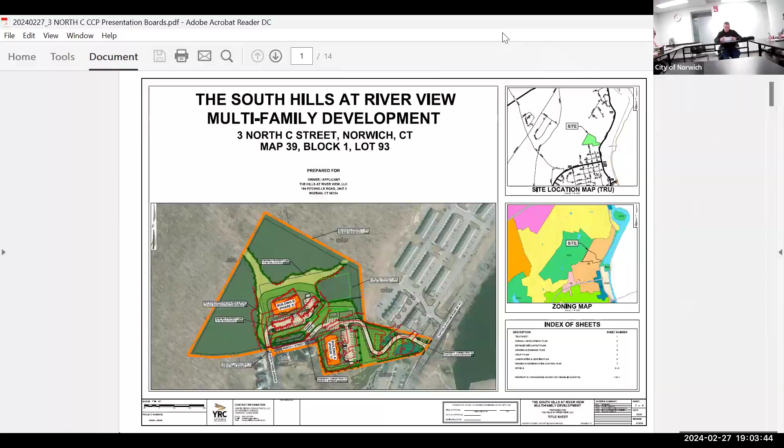The new business is a site development plan proposal, site development plan 1051, 3 North C Street, site plan review for a proposed residential multifamily apartment development consisting of 2 buildings with 33 units each, for a total of 66 units. The unit mix will consist of 24 2-bedroom and 42 1-bedroom units. It's the application and property of the Hills at Riverview LLC, Alex Gebby, principal. This is assessor's map 39, block 1, lot 93, zone multifamily.

This had been tabled from our last meeting. I see Alex's name up there somewhere. Brandon Handfield is on. Brandon, do one of you want to speak, or both?

Yeah, happy to take it from here. For the record, Brandon Handfield, professional engineer licensed in the state of Connecticut, with Yantic River Consultants, we have offices in Lebanon. And as you saw on the meeting tonight is Alex Gebby, the owner and applicant with the Hills at Riverview, as well as Kathy LaCombe, our project architect, to discuss the floor plans, elevation, and rendering.

Before getting into the proposed development, I just want to share my screen and take a minute to briefly go through the existing site, a recent lot line revision that was approved by zoning, and then the previously approved development. I'll show you the plan that we presented in 2020 to give some context of what we're changing. So as long as everybody can see my screen...

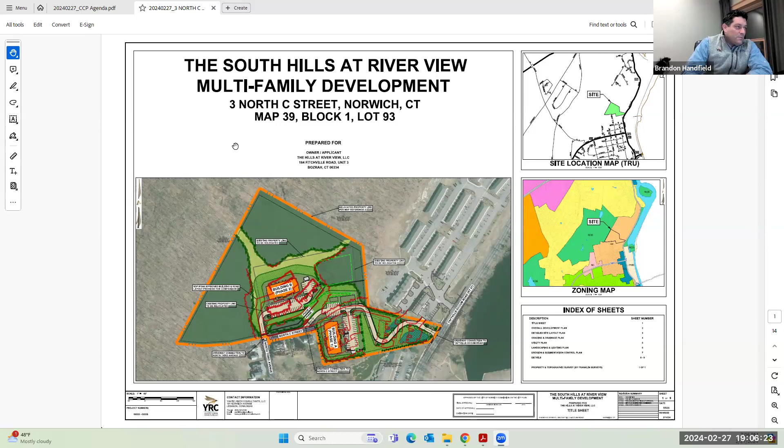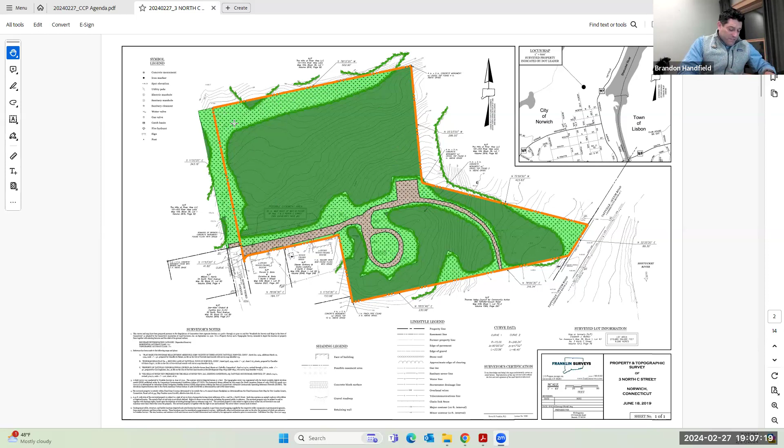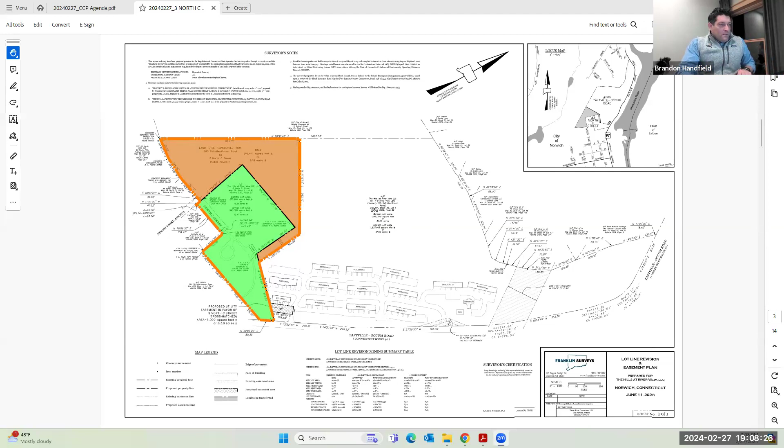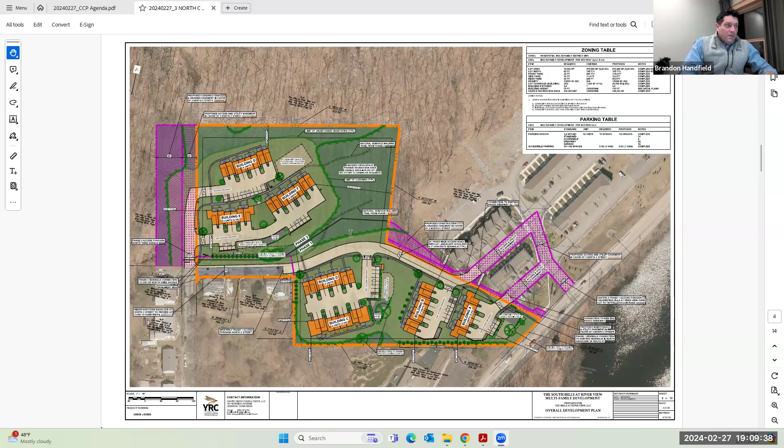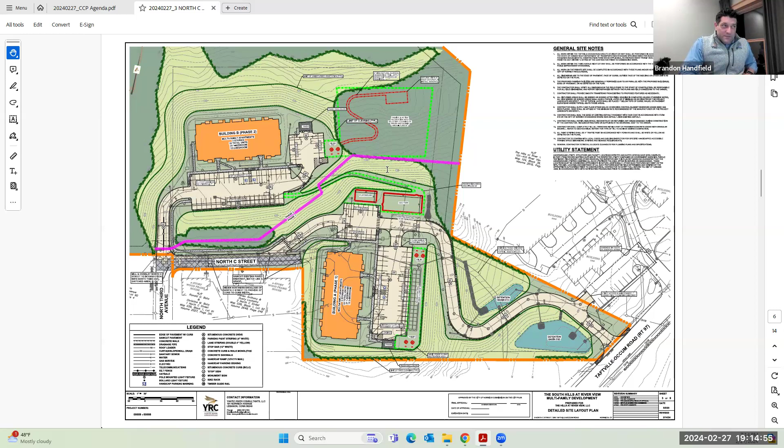We've got a retention pond down in the bottom right there. Yeah, it's a good segue.

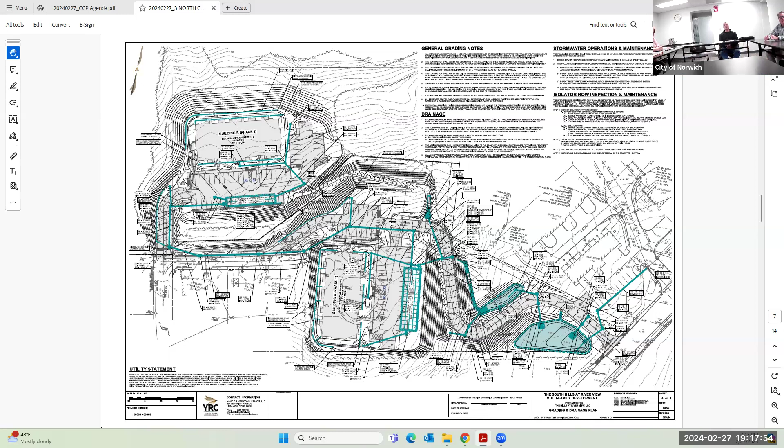Was there any issue with flooding in that area during the last storms? No, I haven't seen any issues with flooding. We're just trying to collect it and divert it where we want it.

So we have a lot of cutoff swales to pick it up so it doesn't come onto our development. It goes around it, and then we pick it up and put it into our system and hold it. So we are holding and infiltrating way more than we're required to.

So for a 25-year storm, we're reducing the outflow by half. And for a 10-year storm, which is about 5 inches or a little under, we're releasing less than 1 CFS, which is not a lot of water. So we're really holding more than we have to on this site intentionally, and that gives us a lot of excess capacity for those bigger storms as well.

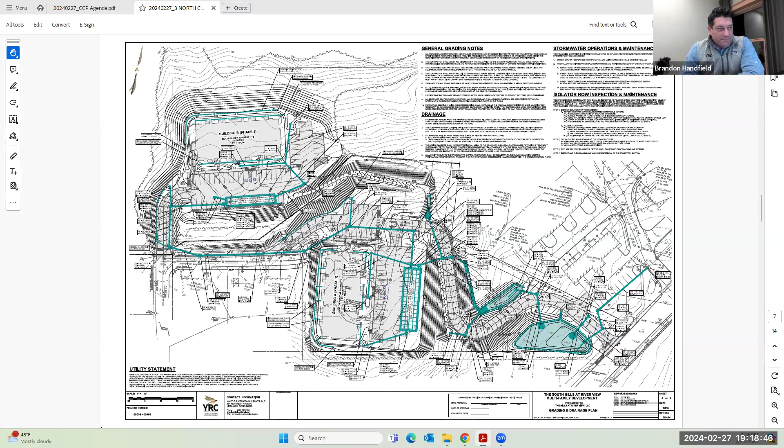General system of utilities, water, sewer, gas, and electric and telecommunications are available to us either at the end of North 3rd Avenue, in North C Street, or on the Hills at Riverview site.

So we're picking up water at the end of North 3rd Avenue. We're running a new water main to serve Building A and a new water main to serve Building B.

We have sewer coming off in green. Sewer's coming off the hill site and coming up the hill and serving both buildings.

Gas will come off North 3rd Avenue and North C Street. And electric, same, we have overhead wires available to us for both North 3rd Avenue and North C Street. So we're able to have short service mains that come onto our site to our transformers and serve each building.

NPU has reviewed it. We do have some items to work out through construction, but we do have adequate utilities to serve the development.

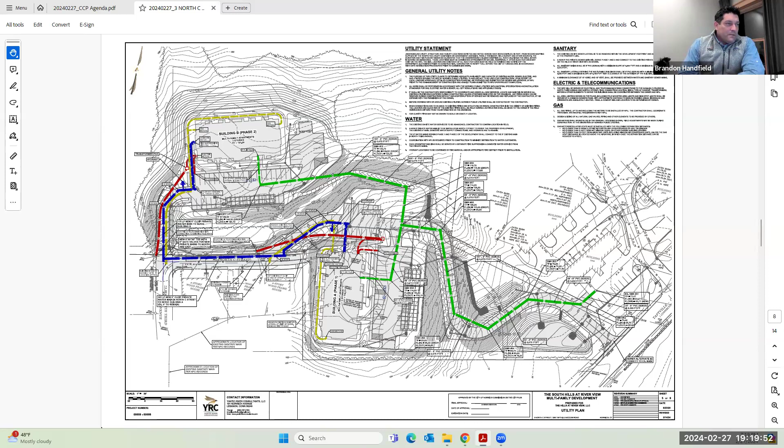A full photometric plan will be submitted to the zoning official as part of this before filing. But in our experience, this spacing typically works with a 15-foot high mounted fixture that will be fully shielded to direct light only where we want it and avoid glare onto adjacent properties.

The landscaping, I'll start with the formal landscaping. Our formal landscaping consists of street trees and parking trees. So paralleling the main access drive coming off Route 97, we have a mixture of flowering and native shade trees. These are plums and dogwoods that are native to New England. We also have a mixture of maples to provide shade, and that continues up.

And it also around the recreation area, same mix, and a similar pattern for Building B. So we have flowering plums and dogwoods and shade trees around the parking, and we tried to put the shade here to cast some shadows onto the parking area from the south.

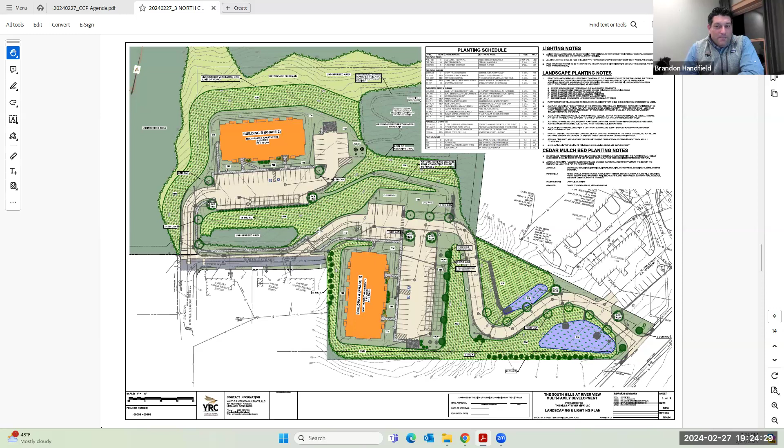Any questions on the landscape? All right.

Same for phase two - it's independently contained within adequate erosion controls, and ultimately we meet the 2002 guidelines for soil erosion and sedimentation control. I think that is it for the site.

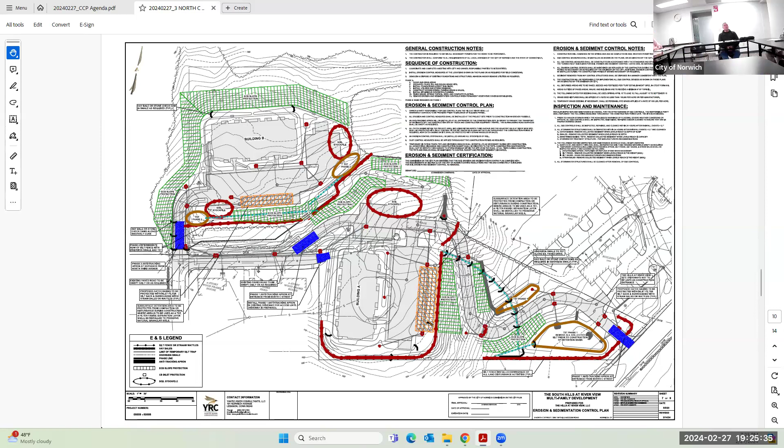If there's no questions right now, I'm happy to hand it over to Kathy to go through the buildings. Any of the members have any questions? Don't hear any. All right, we'll go to the building, the fun stuff.

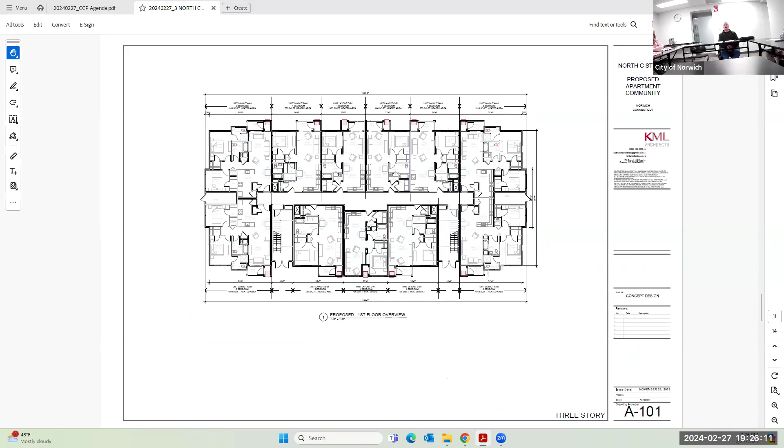Go ahead, Kathy. Hi Kathy, welcome. Did we lose her? I don't know. Unmute - she's on. Kathy, you there? You're muted. Kathy, we can't hear you. You're muted, Kathy. There we go. Yes, there we go. Okay, sorry about that.

Welcome. Thank you. So my name's Kathy LaCombe. I'm with KML Architects, located in Preston, Connecticut. And as Brandon has so thoroughly gone through, there are two buildings.

This floor plan represents the first floor plan of each of the structures. There are 11 units on this floor plan, as well as the other floors. There are four 2-bedrooms that flank, as we're looking at it, the east and west of the building, and that carries up through the other floors, as you will see. All the units have decks, about 45 square feet, except for one unit in the front, to allow the owners some flexibility in price points, to be honest with you.

This project has a central hallway connected by two means of egress that will exit out onto the sidewalk that Brandon delineated before. The two-bedrooms each have two bathrooms, and the one-bedrooms have obviously one bathroom. All the units have washer dryers, and the one-bedrooms range from about 668 to 725 square feet, while the two-bedrooms range from about 1,000 to 1,036 square feet.

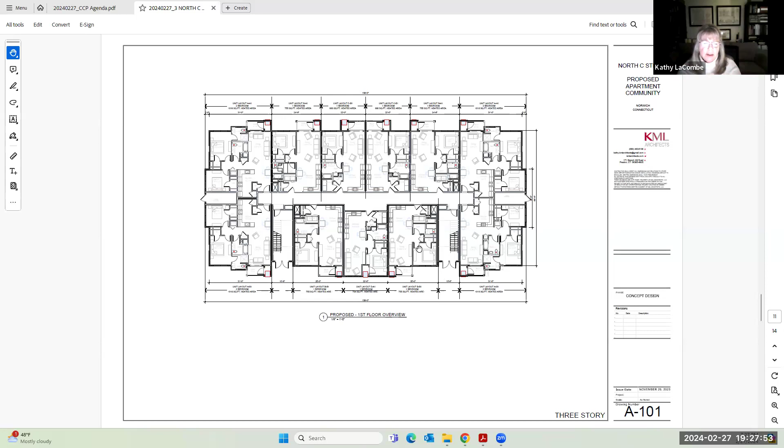One of the things that has been very important to Gebby's is to give people a sense of space. One of the things we've carried through many of their developments is an open kitchen to the living room, so that even though the units are small, you have a different experience because it's wide open, and that presents itself for flexibility. There's a perceived openness and a spatial quality that you don't get when rooms are subdivided.

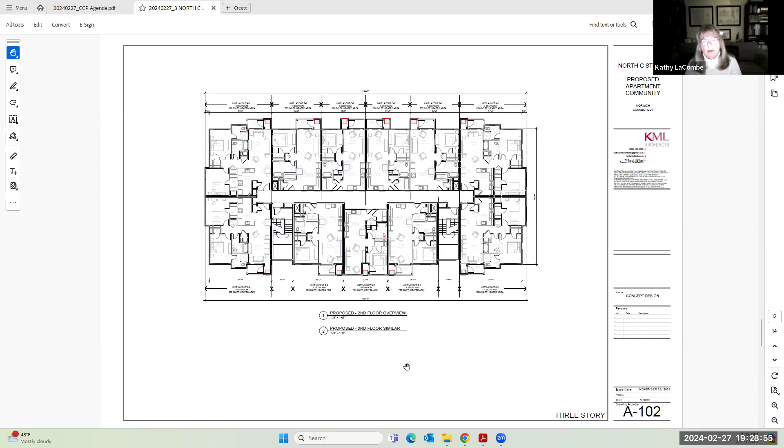Another thing that's very important, if everyone's familiar with West Ledge, this has some of the same features. On the front elevation, there's a central gable, and that's where the 1 bedroom unit is that doesn't have a deck on the 3 levels. The entries are punctuated by the gables with a small vent there just to delineate the entrances and how they are inset from the units.

And the back, we call it the back elevation. It's my belief that no building should have a back, that each elevation has its own merit, and so the back elevation is pleasing to look at, as is the front elevation.

The proposed right and left side elevations, we have to account for utilities, so there's very little fenestration on those elevations, because we have to allow for that, be it gas, electric, or water meters. Those are the realities we have to deal with in construction.

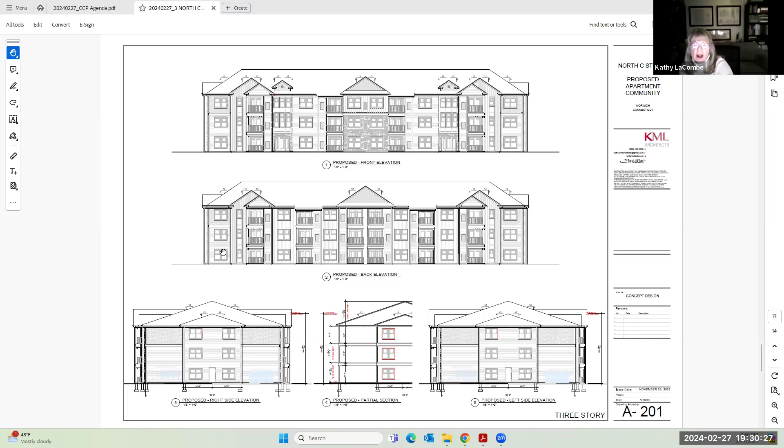So I guess that sums up pretty much my end of it, unless there's any questions. Anybody have any questions for Kathy?

I have a couple questions really quickly. Kathy, is there elevators in these buildings? No, there are none. They are 3-story walk-ups, much like West Ledge. Okay, and is the handicap accessible units on the first floor?

There are type A and type B units on the first floor. They represent different levels of accessibility. Typically, there's one type A for the 2 bedrooms, one type A for the 1 bedroom, and the balance accessed on the first level are type B units. They represent a level of accessibility, but not the true accessibility that you find in, say, a hotel.

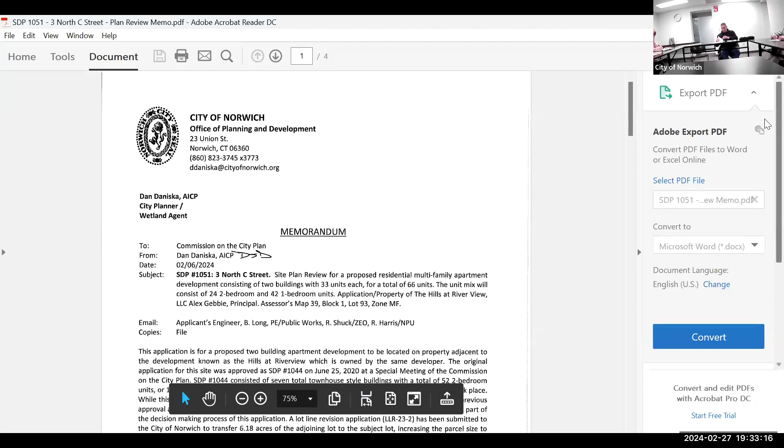So if you look through my memo previously, we had a number of comments and questions. I'll just note at the beginning, they've all been addressed. Brandon sent back extensive comments addressing the fire marshal, NPU, zoning, city engineer, and myself. I had a question about the EV parking. Yeah, Brandon, if you want to address that.

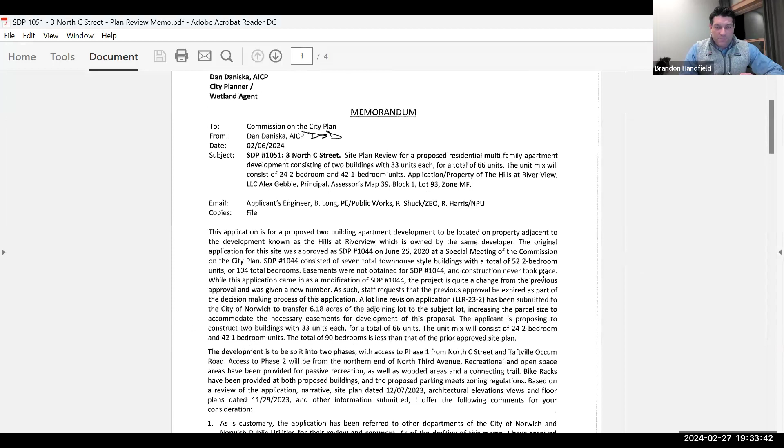Sure. We do show 2 dedicated EV parking spaces for each building. So that basically shows the unit that will be installed between 2 spaces, so that'll be 4 total.

We understand the requirements of the statute. The requirement statutes require 10%, which would be 10 total parking spaces. It's our current experience that at a number of developments we're not seeing 10%, so it's better to install the infrastructure to allow for expansion than to install it up front. So we think 4 is adequate for the current need, but there will be an ability to install the 3 additional units as required, and we will have the infrastructure in place.

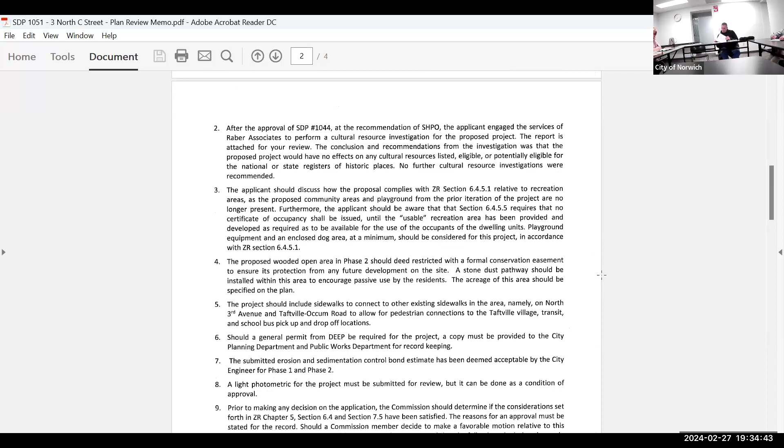We kind of went through that already. At the suggestion of SHPO at the original approval, they had an archaeology study done. There's nothing really there, and the new project won't have any effect on it.

I did talk about doing all of the recreational improvements with the first phase, but talking with Brandon, they're going to be kind of separate construction sites, and they're going to do the most with the first building, so we're okay with that. They'll do the second, upper level, the second time, so people in the first building will still be able to use the lower site while construction's going on in the second phase.

The bond, the E&S bond, is acceptable by the city engineer for phase 1 and phase 2. I had comments about sidewalks that were addressed in the updated plan to connect down for kids for the bus or people walking into the village. There are bike racks. We talked about the photometric being submitted.

I didn't see anything about fire hydrants anywhere. Were they shown on the plans? Yeah, we are proposing 2 new hydrants, one in close proximity to the FDC for each utility room. There will be one hydrant within 50 feet of the building A utility room and one hydrant within, I think, 60 feet of the building B utility room.